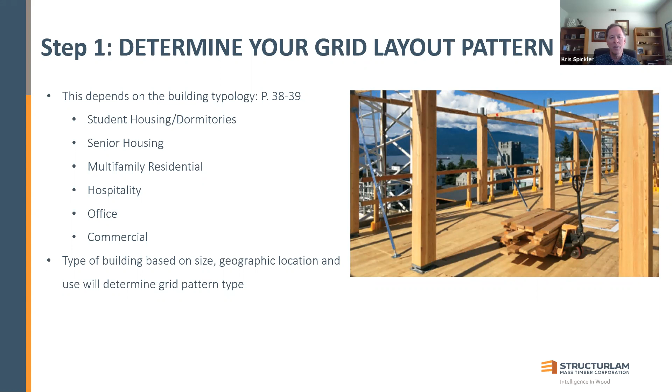Yeah, very good. You're right. Absolutely. And the size of the building, the number of stories, where it's located, is it wind, is it seismic, and so on. But let's talk about selecting the system now. Let's say you've got a grid and now you want to select the system. So we're going to do kind of an all-encompassing look at a few projects with a few systems that we've seen resonate throughout the industry.

We've done 450 mass timber projects with cross-laminated timber in North America, I think about 140 in the US. That may come as a surprise to you. But those of you from the US on the call, shoot me a note and I'll send you the projects that are in your market that we've already done, and if you want to go look at them, you can.

But right now we're going to talk about the post and panel, then the post beam and panel, then a hybrid light frame system, and then we're going to introduce the mass timber system selection chart. So that's the sequence we're going to go in. Very similar to our last presentation, where we introduced them but didn't really drill down. So now we're going to drill down and talk about them. So for this option 1, post and panel system, let's see.

Alese, how about you? Yeah, so for the post and panel system, for those who aren't already familiar with it, it is similar to the Brock Commons project, the 18-story dormitory building at the University of British Columbia campus in Vancouver, BC. For this system, we are spanning the CLT panels directly over the glulam columns, so the panels are spanning in 2 directions.

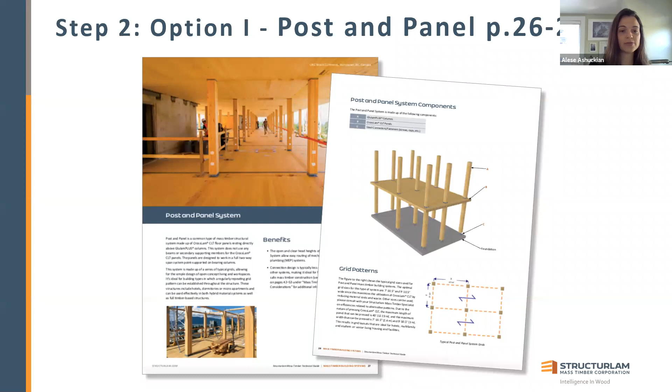That eliminates the need for beams, and so that can help to maximize the floor to floor height. And there is a little bit of limitations in the grid layout though. Yeah, thanks, Kris. So as you can see here, the grid spacing in the Y direction is limited to between 8 and 10 feet max, and then in the X direction about 10 to 14 feet.

Where those limitations come in is because of the panel width. So as Corey mentioned, we're at 7 feet 10.5 inches or 9 feet 10.5 inches for our panel width. So that's what dictates the 8 to 10 foot max width of the grid spacing. And then the length of the grid spacing is limited because we are relying on the strength of the panels in 2 directions, so a combination of the strong axis and weak axis. So that sort of limits the allowable span that the panels can go.

But the benefits of this system, it creates a lot of open and clear head heights. So again, we're eliminating those beams, which can maximize the floor to floor heights. And then also can help to ease the MEP routing and ducting so that you don't have to, again, worry about those beams getting in the way of those utility lines.

And so when you're looking at this system, again, you would probably be looking to a similar type of project as Brock Commons, so the dormitory style projects, multifamily residential, even some apartment projects where you can really work within that tight grid spacing for your floor plan. Yeah, and that makes sense.

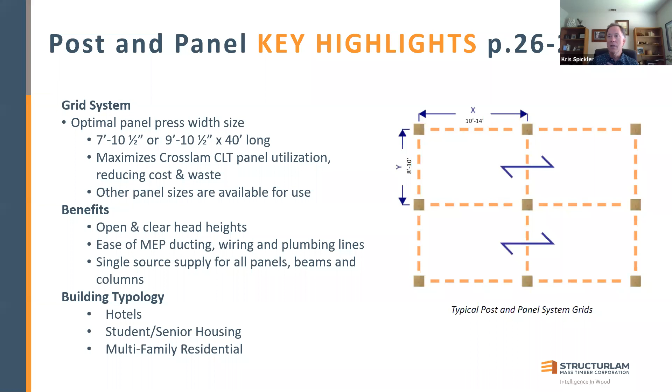And so we kind of want to share that with you for the Brock Commons, but certainly this system can be used in 4 or 5 stories as well. It doesn't have to be 18. So did I miss anything? I think you got it. Good. Okay.

So what we're going to do is run the panels perpendicular to the girders. We're going to have probably more rectangular grid layout. So we're going to span the panels probably somewhere in the 15 feet max range in the one direction, and then you're probably going to have your primary girder in around 30 feet, so probably in the 15 by 30 range.

This reduces the amount of pieces that we have. Reduces the volume of lumber we have, so this can really drive the cost down for both. Then on the other system where we are adding the subframing back, we're probably going to have a more open grid, trying to get maybe closer to 20 by 20, maybe even as much as 30 by 30. We're adding those subframing members so that we can use a 3-ply panel usually.

Really the name of the game is to have the thinnest panel possible. And I think that usually you start adding subframing once you have 20 feet as the grid in both directions. So if you have a 20 by 20 minimum, you're probably going to go with this over the other system where you remove the subframing.

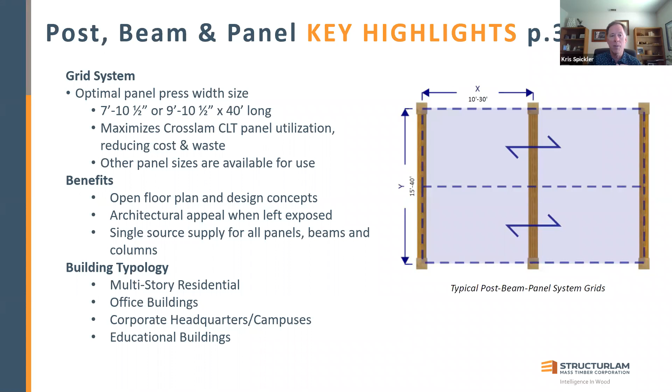Let's see, did we capture everything we wanted to on these 2 buildings, Corey? I think so. Okay, all right. I'll just mention that we see these buildings in a 20 by 20 grid to a 30 by 30 grid economically done. The 20 by 20 can be done with just the post, beam and panel, but you're going to have to add that subframing, like Corey mentioned, to get you your 30 by 30 grid. But you can still get into a 3-ply panel, just over 4 inches thick, to economize the deck throughout the whole project, which allows us to come up with our best system for that value.

Moving right along. Okay, hybrid light frame system. So when we think of hybrids, there's a couple of types of hybrids. This hybrid is that we're using a conventional framed wall, could be framed out of studs made with wood or steel, and we typically see it framed in a factory. So it's factory built, sent to site, pick and place, that allows you to compress the schedule.

Now at Structurlam, we understand the system, we complement the system with a CLT deck. The way that you can also pick and place even up to a 10 by 40 CLT deck, 400 square feet every 15 minutes.

Do the math, 25 to 30 panels a day, you're going 10 to 12,000 square feet a day of deck being rolled out. So that's an efficient, that's a fast system. But if we're going to use this system, there's a couple of things that we really need to do. We need to economize it.

We want to be able to get that deck typically to a 3-ply panel, just over 4-inch thick panel. And we do that by trying to coach those that are putting these together and putting in the wall layouts at maybe a 12-foot max, 12.5-foot max. We can then take a panel and do 3 of those spans with a 40-foot panel, and we can capture the system to be able to perform for vibration, for the structural values, but also you want to be able to get that system to work for fire, acoustics, and being able to put in your mechanical.

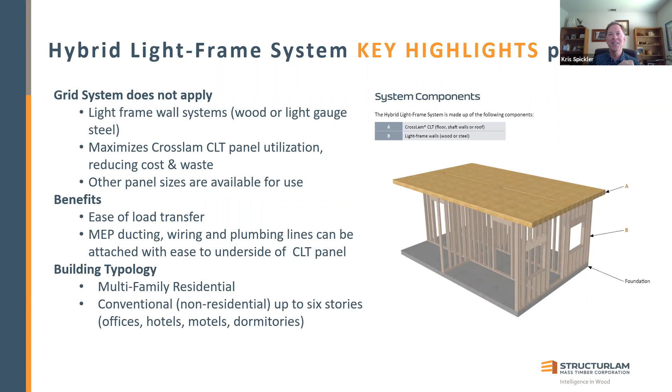So now, system selection chart summary. So we want to go through and give you a view of our best practices for the different units. Let me just say that I think the drive that we have is to allow the system selection chart to pick for your occupancy, for your grid, for your location, the best system. But remember, economizing that system and considering all the aspects of a system design, it may in some cases give you a thicker panel because you save money in insulation or concrete on top, but I think the net value of that system is what we want to drive towards. And our best chance of getting there is we try to drive the economics of the system down.

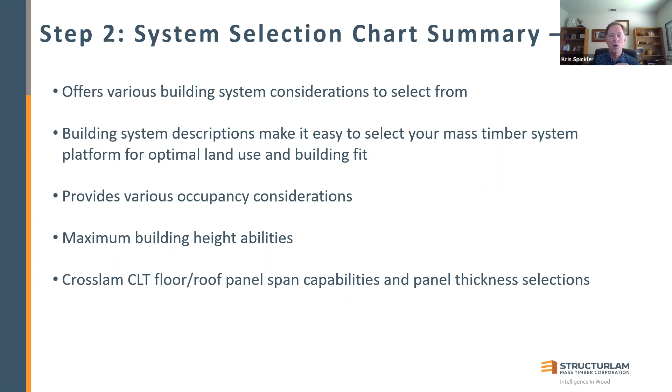So Cory, I want you to take us through this table. I know they're a bit hard to see. We've got them on pages 38 and 39, but walk us through this. Yeah, sorry, I was on mute.

Looking through these, we've already covered post, beam and panel and post and panel. I would maybe, before we dive into everything, draw everyone down to the steel CLT hybrid. That's something I've seen become very popular in Southern California and the South Central market, really popular in Texas, especially because for these office structures, it's kind of the low entry point to CLT. You still get to keep your big 40 by 45 grid or whatever works best for your office furniture. And you're really just trading out that B deck for the CLT on top. And you don't have to shore it now, which is usually a pretty easy sell for the whole project team.

But kind of looking at... That's good. I might just tag on to the next one if I'm okay with jumping in here, Cory. I know that the post and panel obviously was Rock Commons, the post beam and panel maybe First Tech, and then post beam purlin panel maybe Carbon 12. And then of course the Virtuoso for that hybrid system.

And then that other hybrid Cory talked about is 901 East 6th Street in Austin, Texas. Cory, you know that project well, office building that we did about 5 years ago. And we're seeing more of that. But then there's that last one, that CLT tilt-up. And I don't think we talk about that a lot. But I do know that we've done a number of these. We did a fitness center in Spokane, Washington that turned out beautiful.

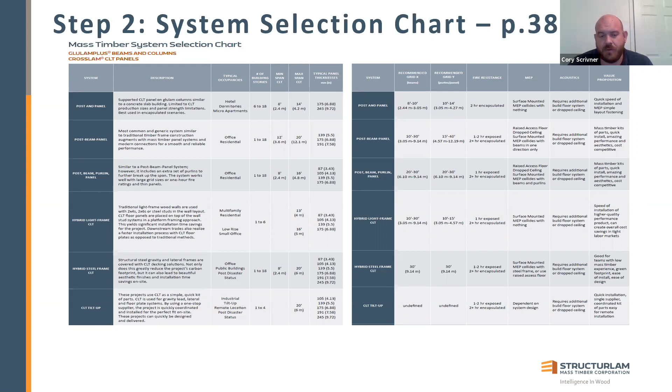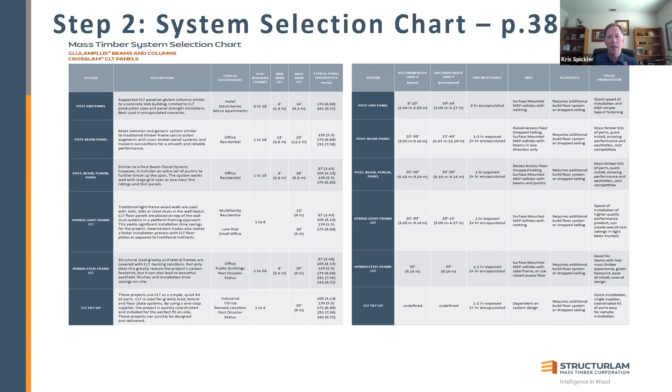Yeah, there's a lot here on these charts, and it goes through every aspect of trying to validate the system you've picked. But as we talked earlier, there are critical considerations for design. It's just not about the panel. So let's walk through, well, how about connections? Sure. How about fire performance, acoustics, vibration? We're going to touch on all of these. Each one would take a separate webinar to really spend the time that we need to. As professionals, all of us are willing to consult with you on each one of these, and happy to do that. But we're going to touch on them. And Elise, maybe you want to start with connections.

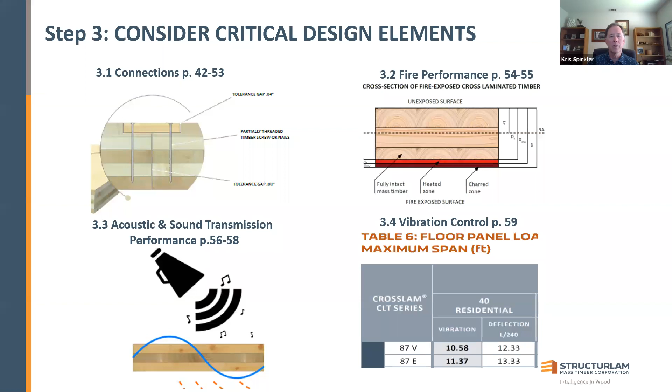Yeah. So I'll just quickly highlight some different connection types that are worth considering as you're looking at a CLT project. Some of them are shown here on the screen. One of the main connection types that's really important to consider, and the advantages and disadvantages of different options, is the spline connection, or the adjacent panel connection. We show here the plywood spline. There's also a butt joint connection, half lap. There are a few different ways to address the panel to panel connections.

I probably most often see the plywood spline, and this option has a few advantages. One being that the plywood spline can be designed to transfer horizontal shear, so the CLT system can be part of your horizontal diaphragm. And even using nails, you can design that spline to transfer the horizontal shear from panel to panel to create a full horizontal shear system.

When you're looking at it, there's also the half lap, which can also be designed. There's a little bit of waste that's inherent in the half lap connection, but that's also a great one too. And then again, the butt joint connection where you're just screwing the adjacent panels together.

When you're looking at the glulam connections, there are a few different types to consider here as well. Custom steel connections, but then also proprietary systems. And so here we show the hidden connectors. Ricons or Megants are a common type of these connectors. They are concealed within the glulam beam and column. And so they are pre-assembled in our factory and shipped out to site ready for assembly. And since they are concealed, they can work with the fire rating requirements, so working within that char calculation to be fully encapsulated and meet the fire rating requirements of the building.

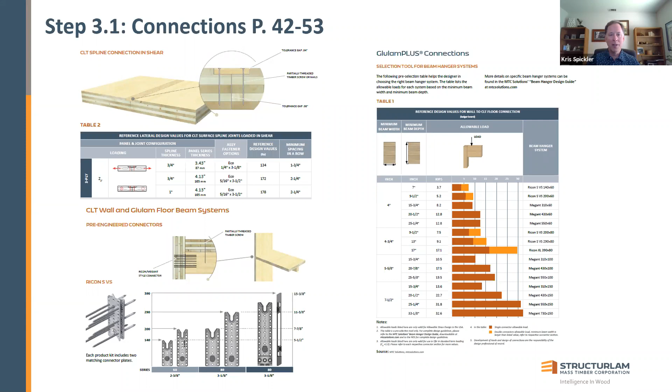Whoa, fire. I hear Cory's name. I think, Cory, didn't you say, Kris, I've got to do the fire performance section? I don't know if I said it like that, but I think I agreed to it.

You know, there's a few different ways you can handle fire. You can do testing of the panels, but you can also do, God forbid, cover it with sheetrock. But definitely the most popular way to go about it is the char method that's in chapter 16 of the NDS. There's actually a formula there at the bottom of the screen. Really, it works out to where about every hour of fire rating you need, you're going to add about 1.8 inches of material and do your loading calculation with the reduced section. That's all based in the stuff in chapter 16. You actually get a pretty big allowable load increase for that specific condition.

But maybe taking it over to the table on the right, this is table 601 out of the IBC. And this is really where I think you can target some very large savings. Specifically, we've kind of dug into which buildings were which types, but type 4A, I think that's where I see a lot of projects that might be able to be type 3B, and they go with the type 3A, and they're having this extra hour of fire rating required to the primary structure, which could add maybe 10 to 15% to their mass timber package.

Also, especially the type 4 heavy timber, the traditional way we do it, you're actually using code minimum prescriptive sizes that are actually pretty cost effective for those structures. Now, there are some different stipulations to why it hasn't become as popular, like concealed space, but really it's considering your building type pretty thoroughly when you're going to go down the mass timber path to make sure you're getting the optimal building classification type so that you don't have a huge fire rating you maybe could have avoided. Yeah, that's right.

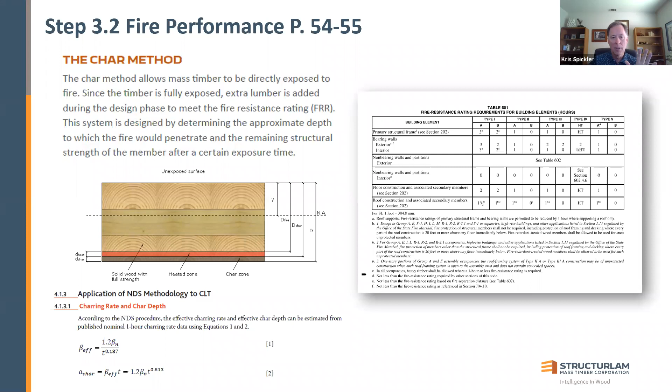So enough, stop. Okay, I will. Moving on, acoustics. Who wants to take acoustics? I think I drew the short straw on this one.

One thing I will say is I've actually seen projects where they're using a 3-ply and they've designed it for that. And then they get into acoustic solutions and they're having to add 2 layers of this expensive Acoustimat. And they just say, I'll just use a little bit thicker CLT to get the code minimum and just use 1 layer of Acoustimat. So looking at the total assembly approach is really important, because sometimes you might be able to bump up other materials like the CLT to drive down the cost of others.

Yeah, and this is just a short glimpse into why acoustic performance is important to consider in your system. We can work through all the systems, but you may need an acoustic consultant. We're happy to point you in the right direction and talk about what's important, because there's way more to it than just STC and IIC. But with mass timber systems, because of the very tight tolerances, they can be built with peel and stick membranes that allow you to really seal off units and keep sound from vibrating through the unit.

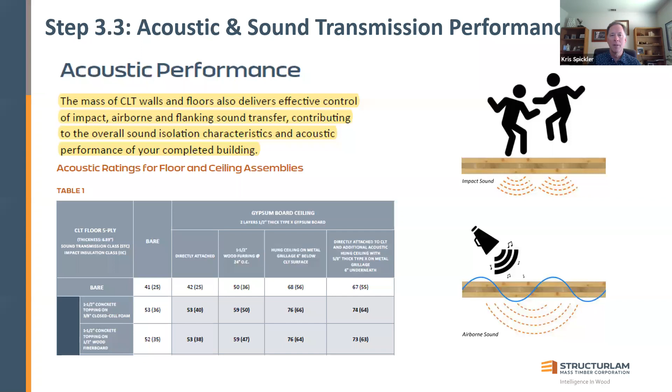So enough on that. We're running along on time here. Might have to play catch up here, Elise. I think you're on vibration. Yeah, I'll keep it pretty short and sweet with vibration.

When you're looking at vibration, there's a couple main points to consider. One of the most important things to remember is that it's either code minimum or code plus. So through vibration design, we're going above the code to give a sturdy feeling floor. We're really getting up into the concrete feel of a structure where we're using thin wood floor plates, but we have a really sturdy and solid feeling floor.

In other structures that need to go more in depth into the design of vibration, the industry is going deeper to evaluate not only the frequency of the floor panel itself, but the entire support structure to measure the vibration of the entire floor system.

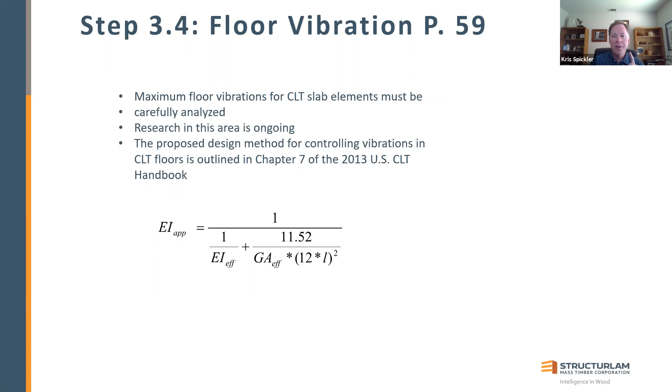Yes, so if you could go to the next slide, please. I might just say for you, Canadians in the audience, you're maybe thinking to yourselves, we've got vibration in our code. Yes, you do. You're way ahead of us, but we're coming up with it, okay?

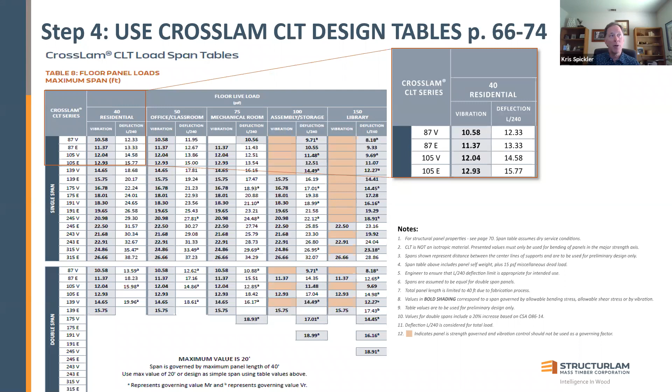Wow, right now I know that chat function's going crazy with all kinds of questions, and they want to know what each one of those numbered notes means, and we can walk through that with you on the next round. But let's talk about Glulam Plus. Cory, I think you've got this one to talk about the sizes, what we make, and the values for engineering.

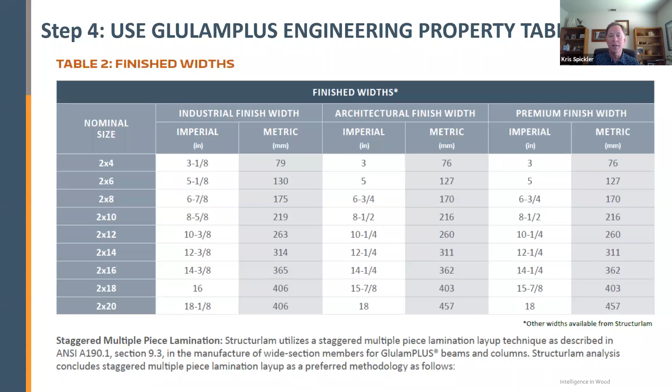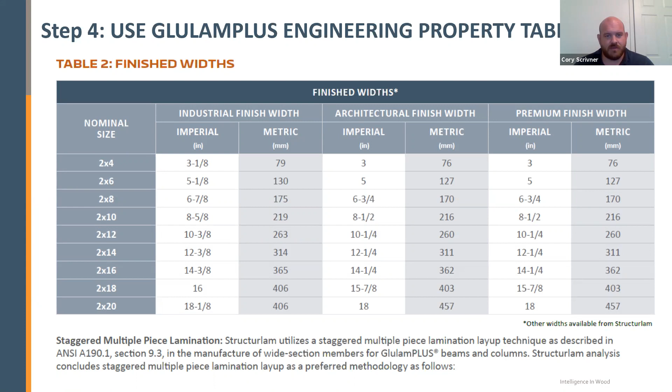Yeah, I'll try and make this brief so we can get to the Q&A part. So this is a chart that we have in our design guide to help you keep track of the difference between the industrial sizes and the architectural sizes as far as width goes for our Glulam. So whenever we do that sanding on the beam for the architectural grade finish, we take a little bit of that width off. Another thing to note is that we actually do staggered multiple piece laminations, which can change some of the widths a little bit as well.

Let's just go on to the next one, Kris. I'm trying to get to the... You're trying to roll. Okay. Yeah, we got 10 minutes left.

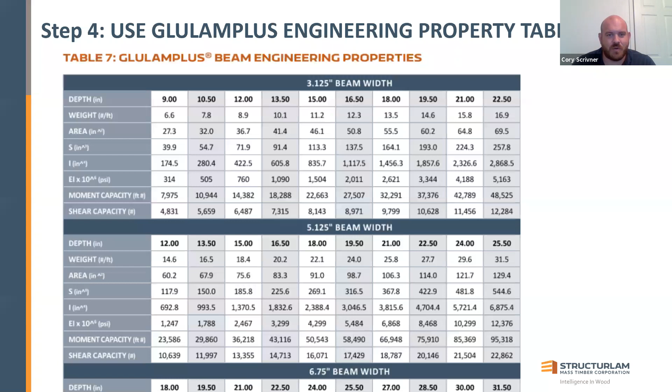So this is some design values for our Glulam beams. We have these charts that go up all the way to 20 inches wide to give you some properties to use. So if there's anyone that wants to do a deeper dive on what we make, we're happy to answer some questions on that. I'm sure we will.

So hey, we made it. We're to slide 29. We're talking about budgeting. I think that's me too. I think it is. I think you're the budget king. No, Michael Kaskak is. But you go ahead.

Yeah. So once we've gone through this whole process, we'll put together a budget for you. Make sure that you understand everything that's included. We want to approach this like we're sending you a complete system package. And then most importantly, if it doesn't meet your budget, we need to go through steps 1 through 4 again to find a solution that does.

So I think that's the big thing. Some people are like, well, okay, the project that had 20-foot cantilevers all the way around was too expensive. It's like, okay, well, maybe we look at one with no cantilevers, stuff like that, going back through, and we're happy to provide some value engineered ideas while trying to respect the architectural intent at the same time. It's kind of a fine line to walk, but I think we do it pretty well.

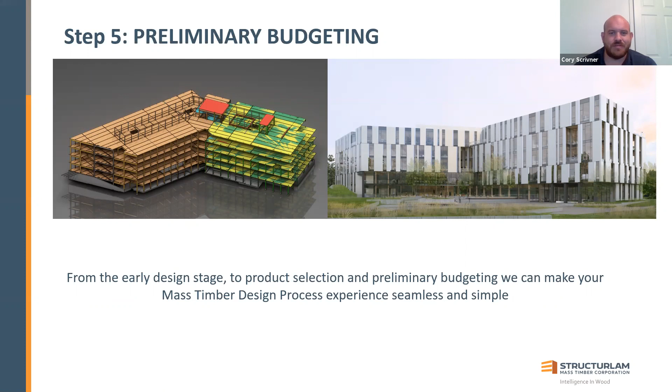Very good. So, mass timber design process summary. I got to do the summary here, and I could read through all of these, and we've walked you through all 5 steps and ended up down at budgeting here. But I think what we really want to drive through is that prefabrication, and being able to 3D model and then clash detection, bring all the components of the building together to find out how are we building this.

Does some plumbing pipe hit something else? We want to go through and kind of vet all that. So it's in that BIM process that if you have a BIM specialist in your team, that you can kind of meet what the promises of the future, which I believe is we want to be on time and on budget, right? Instead of trying to fab it in the field, we want to move everything into the shop and fab it.

But along with that comes this, building information modeling, and where we all work together as a team to do that. So we can build it in our computers, then build it in the shop. And then when it gets out to site, we know how many days it's going to take to go up, and we know the cost because we've got it down to the screw in that package. There's no waste on site.

So I think that is kind of my last promise, is that if we can get on board and help you with this process up front, and if you have a BIM specialist, that's the future of the industry, and that's where we want to take you with this. So any last thoughts, Cory or Elise?